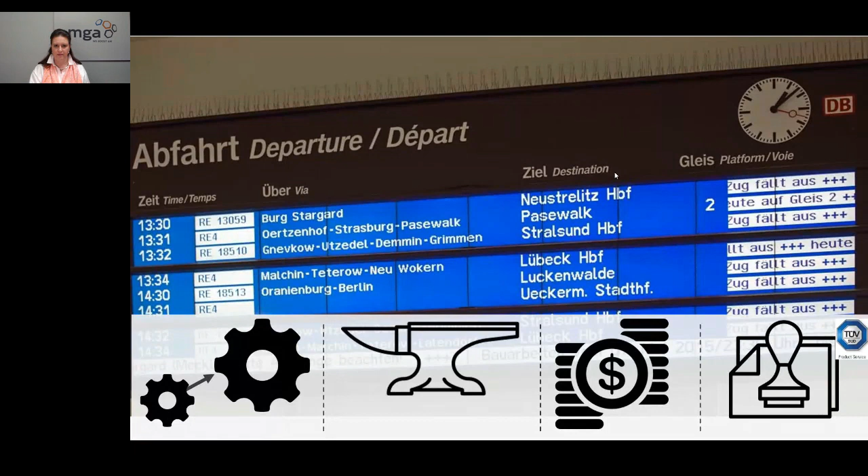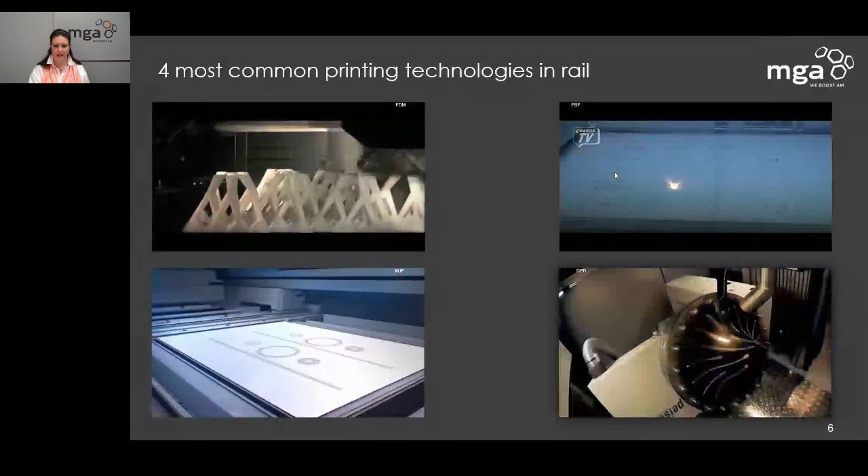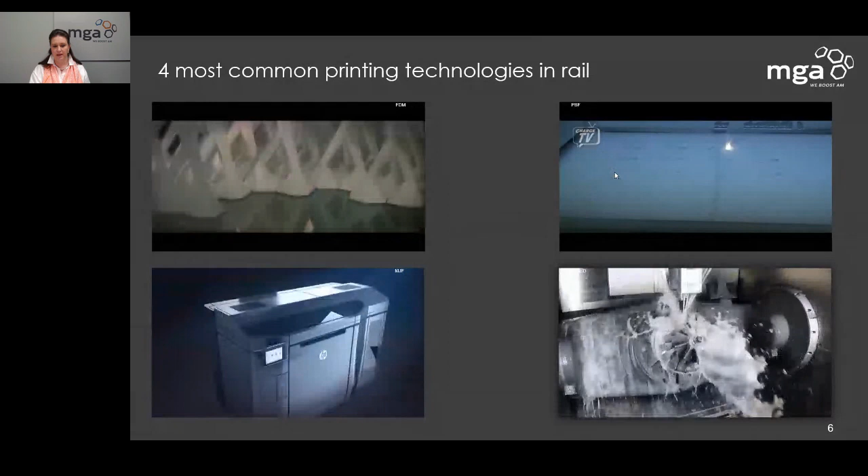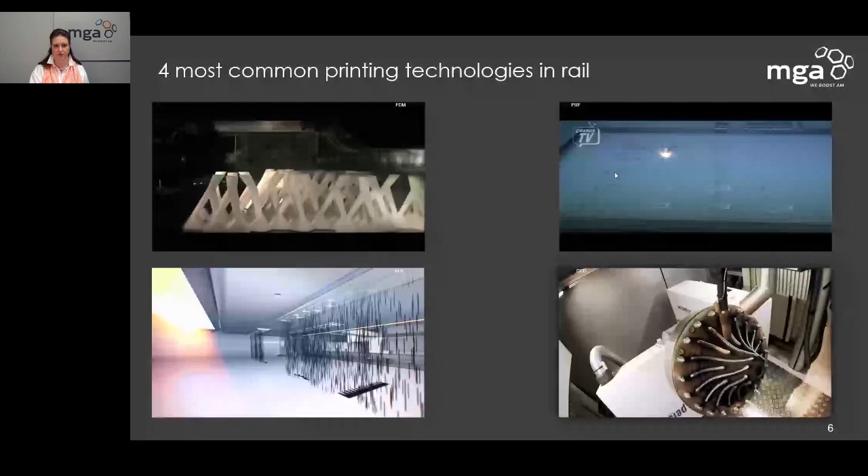So what are the main technologies we are using in the railway sector? A lot of FDM. This is due to the fact that our high levels of quality and flame retardancy are just and only covered by FDM materials. We use powder bed fusion quite a lot, and later on I will show you some parts of what it's used for — for instance, in the polymer sector as well as in metals. We also tried out multi-jet fusion, since there we can cover a lot of different parts, and the coloring aspect is very interesting too. And we need big metal parts, so we use wire arc additive manufacturing, which you can see in the lower right.

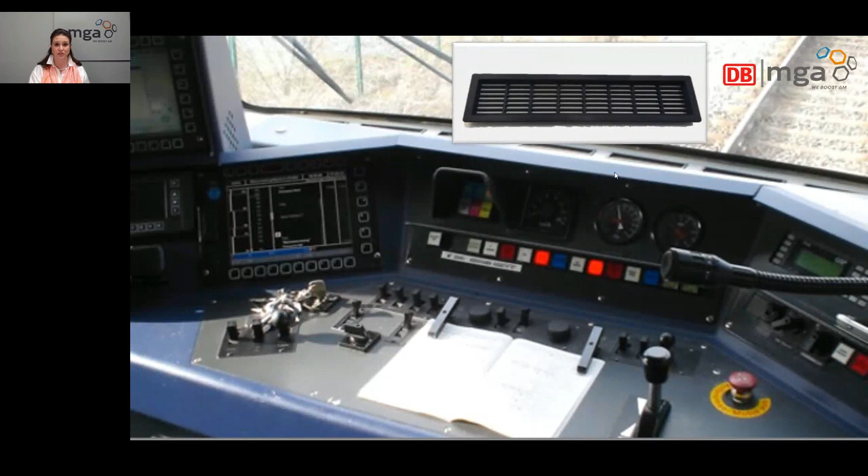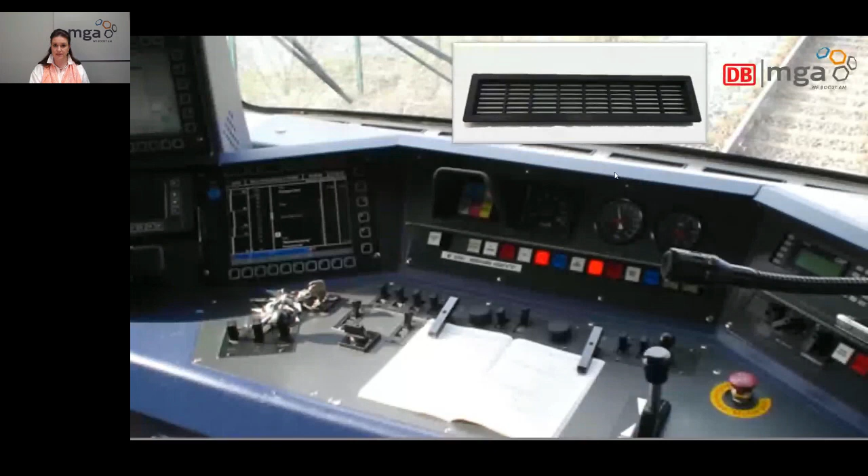So this is a typical part we've printed for the rail sector. It's also responsible for the air conditioning system. This is a driver stand you can see here, and this is a very typical part. What's really interesting is that it's quite common, like the aviation parts from Lufthansa or other flying companies, but the design is just a little bit different, and therefore we need this very high level of flame retardancy.

You might ask why it is so important, and we have a lot of materials already certified for the aviation sector. Yes, but that may not be sufficient. Because in the aviation industry, as soon as you've landed a plane, you have like 90 seconds until at the latest the plane is emptied.

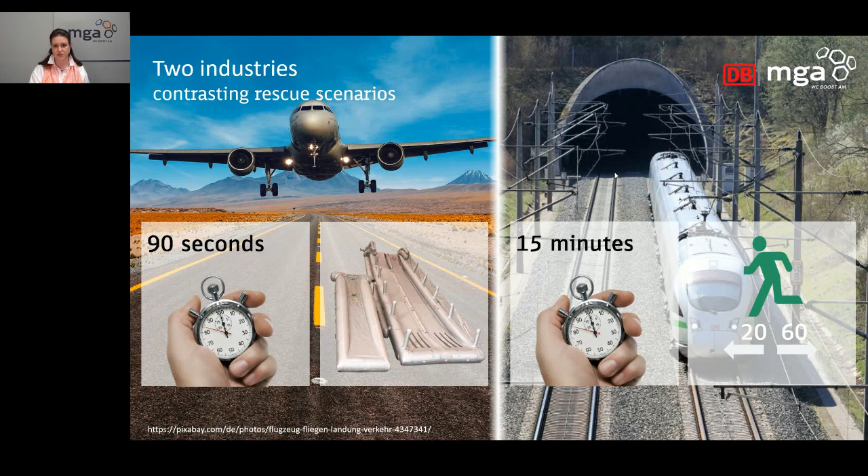In a train, you might need 12 or 15 minutes coming out of a tunnel to be able to stop anywhere and get all those people out. If you take into account toxicity concerns, and that we don't have oxygen masks in trains, you'll understand we have a different level of flame retardancy required. And that can be covered with FDM technology.

In the railway sector, we also have very interesting individualized cases. Handrail signs for blind people are a great example, because each one is unique - saying things like 'street exit XYZ.' Each sign needs its own translation into Braille. So we tried additive manufacturing of metal parts for this, and it even lowers costs by up to 50%. This is really, really interesting.

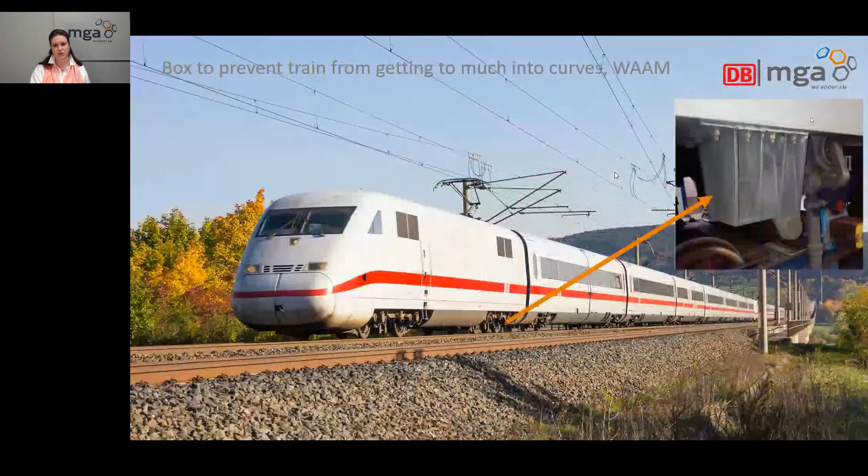As I mentioned, the railway industry needs a lot of very big parts. This is a box - a 27 kilogram heavy stainless steel box - used on high-speed trains going 350 kilometers per hour. Of course, it's a safety relevant part because it prevents the train from going too far into curves, so we need a lot of certification.

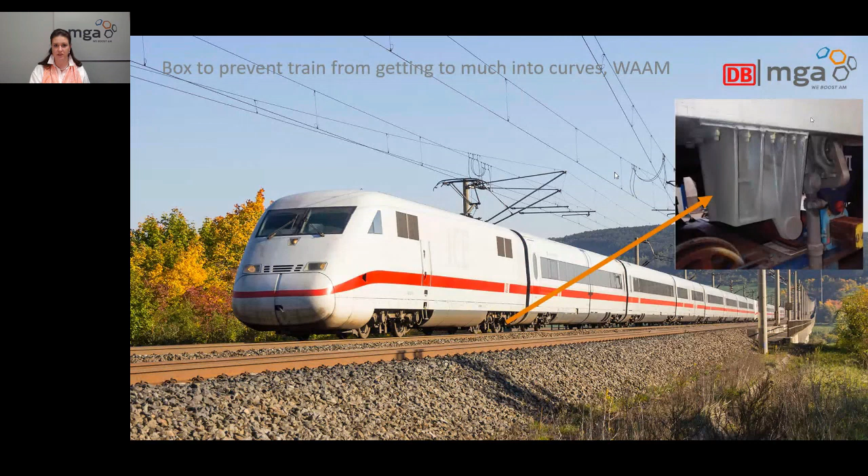If you do something like that, you really have to cover a lot of certification processes. So this is what we've done: we put it on a test stand and simulated another 30 years of operation, though we only need 7 or 8. We did a lot of testing and CT analysis, and now we're absolutely sure this part is exactly as good as the former part.

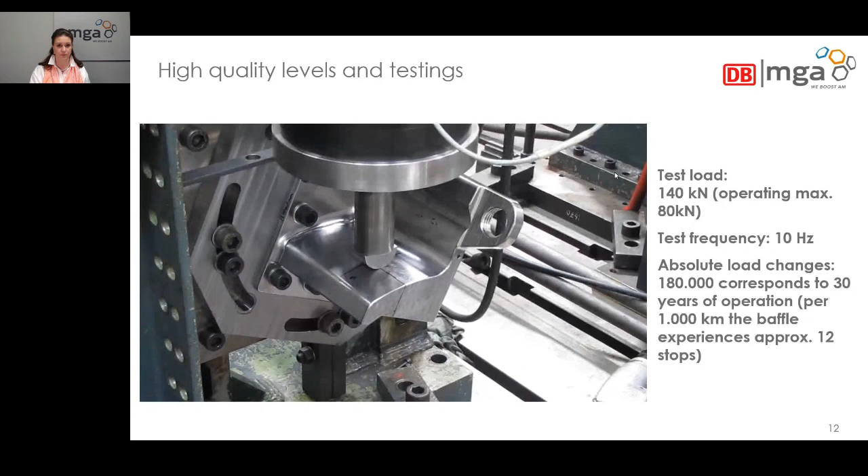As soon as we try to exchange an obsolete spare part, we have to fulfill the requirement that form, fit, and function are the same as before.

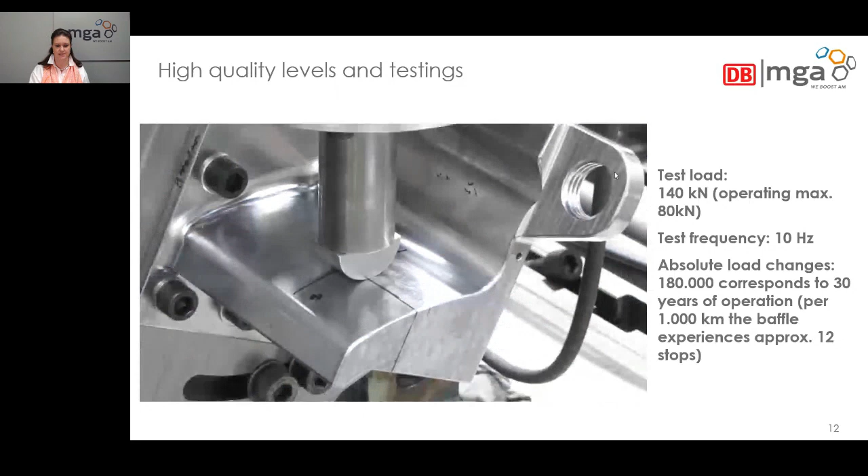If you go to the printing industry, every printing provider will tell you they can do everything, which is nonsense. So we initiated an audit in cooperation with the certification body TÜV Süd, and we asked our printing service bureaus to complete this audit before delivering parts to railway companies. This is a general audit logic that can also be used by other sectors.

Something that came up the year before, in 2021, is the tooling aspect. Usually in other sectors you'll find it the other way around - they pick the low-hanging fruits with tooling first, and do spare parts afterward. We did it the other way around, but now we've also started doing tooling.

What you can see are little fixtures and templates used to fix little stickers, like here on the headrests of seats. Before, they always had to measure how to place that little sticker, and now they just have an easily printed aid to do this quickly and easily.

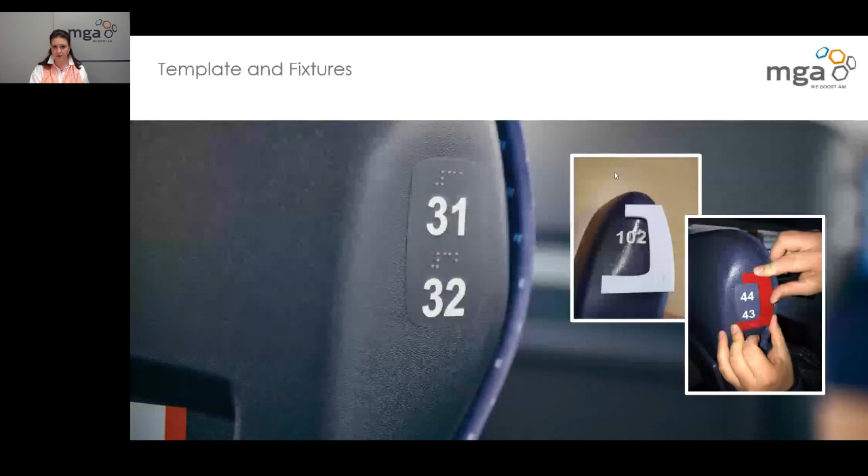Fast, lean management are also big issues in the rail industry. This is how we support lean projects in the rail industry, by printing little fixtures for shadow boards.

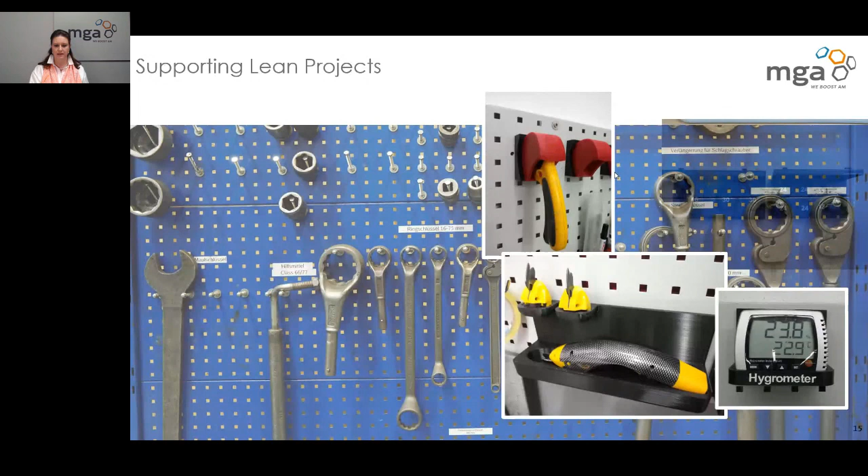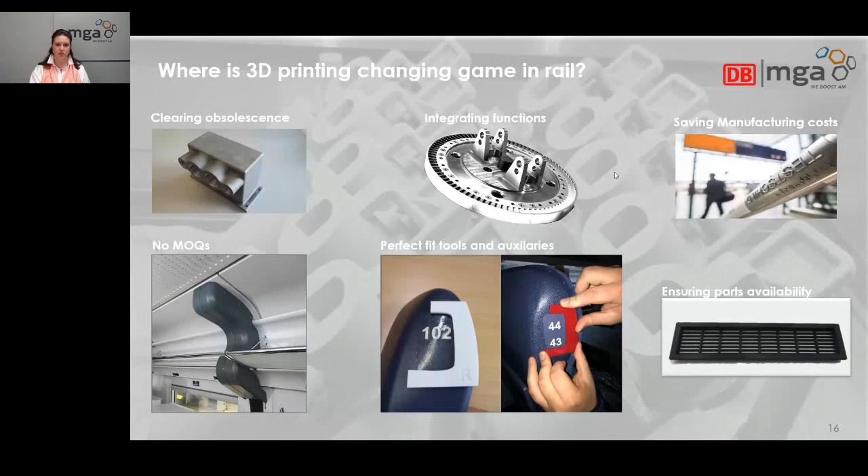If you ask what we use additive manufacturing for in general in the railway industry: for us, it's a great solution to get our hands on printed parts we couldn't get on the market anymore, clearing obsolescence. We've also integrated functions to make maintenance easier, and picked some very interesting economic cases. There are no minimum order quantities, and in the railway sector we're often talking about just 1 to 50, or 1 to 500 parts needed, so additive manufacturing makes sense. We print a lot of tools in our premises and maintenance workshops, ensuring part availability.

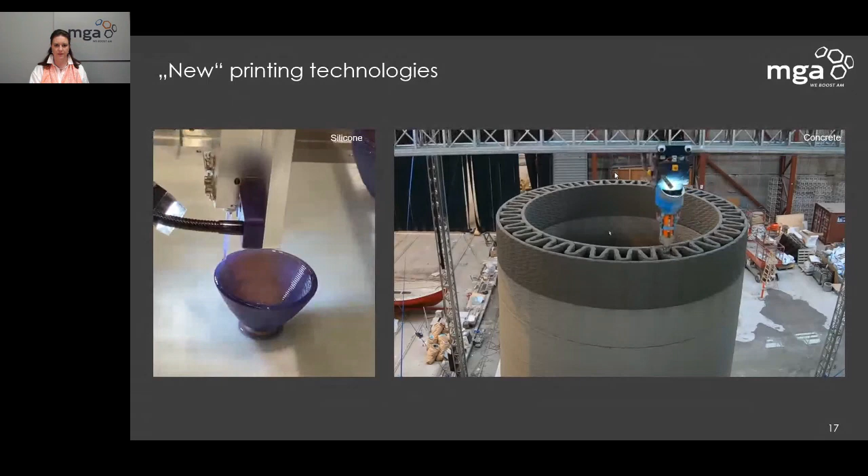So what are the latest trends in rail? What we're needing is an equivalent for rubber parts, so we figured out that silicone printing would be very attractive to us - this is a technology we're just about to test. Another thing is printing of concrete. If you dive a bit deeper into concrete printing, you'll find it's at the point where spare parts printing was approximately 5 years ago. So they have a bit of a way to go, but it's already very interesting.

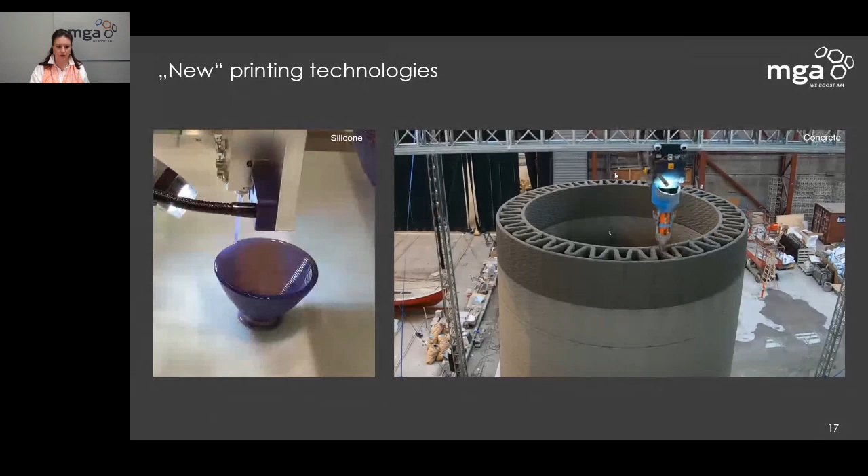What kind of rubber parts am I talking about? I'm talking about seals, bellows for dust covers, bumpers, and some elastic holders. So there's a huge variety. And they all have in common that after 6 years, whether you use them or they're still in your warehouse, you have to throw them away, because our regulations say you're not allowed to bring them into the trains anymore. This is why it really makes sense to print those parts in small numbers on demand.

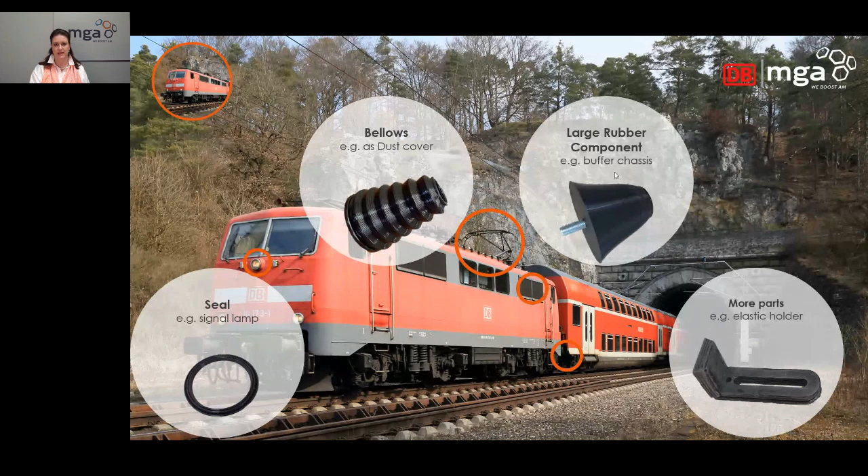With that, we can save millions of euros. In the meantime, at Deutsche Bahn, the German railway company, which is a huge corporate with more than 300,000 employees, we started in 2015 with the first printed parts, which was a coat hanger. Then, one year later, we founded Mobility Goes Additive. The idea was to exchange with other companies about printable parts and their experiences with certain materials, and to enhance the number of printable parts.

In 2018, we printed our first huge metal parts. And then we established what we call an employee competition to get our hands on the great ideas of our employees. Our next big aim, and this is really a huge task, is to be capable of printing 10% of our parts on stock.

To give you an idea, just in the rolling stock segment, and we also have a lot of infrastructure too, we have parts worth 600 million euros on stock every year. As soon as we can exchange that against printed parts on demand by maybe 10%, we have a pure cash out. This is what we're aiming for next.

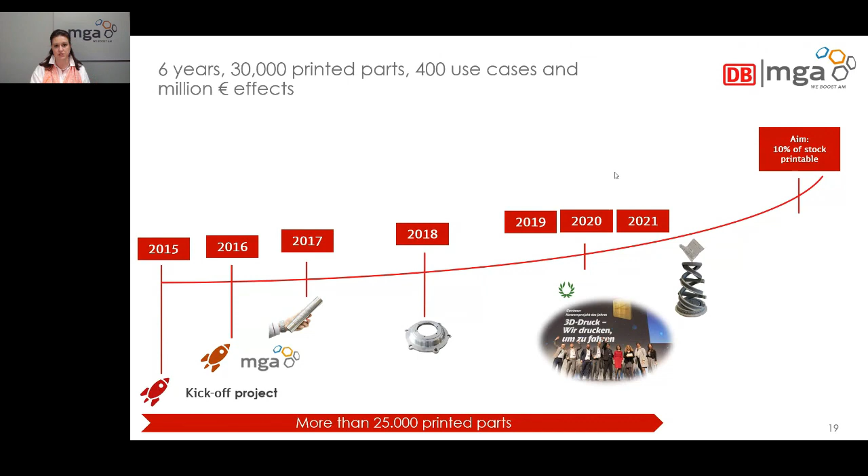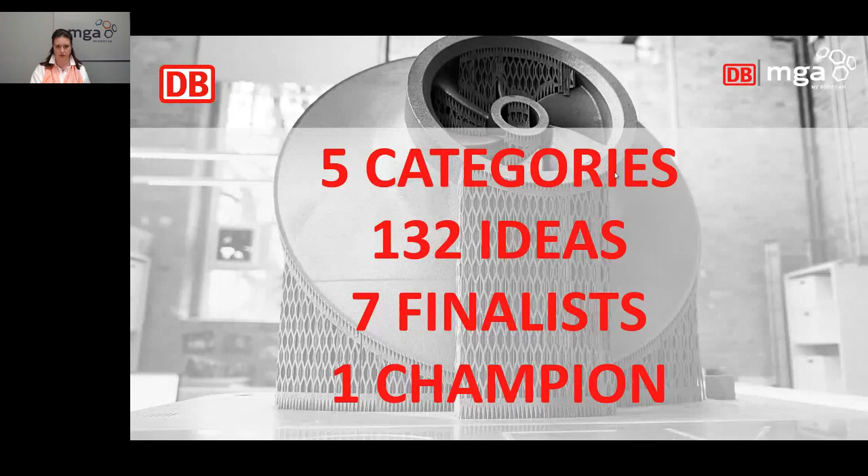In our employee competition, which addresses not only engineers but all people throughout the company, we have 5 categories. We got more than 130 ideas. We had 7 finalists and 1 champion, of course. Here you get to learn what the ideas were.

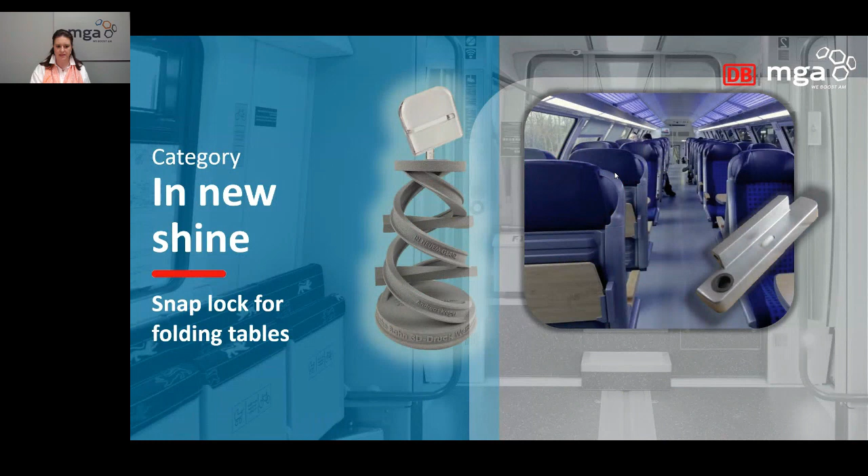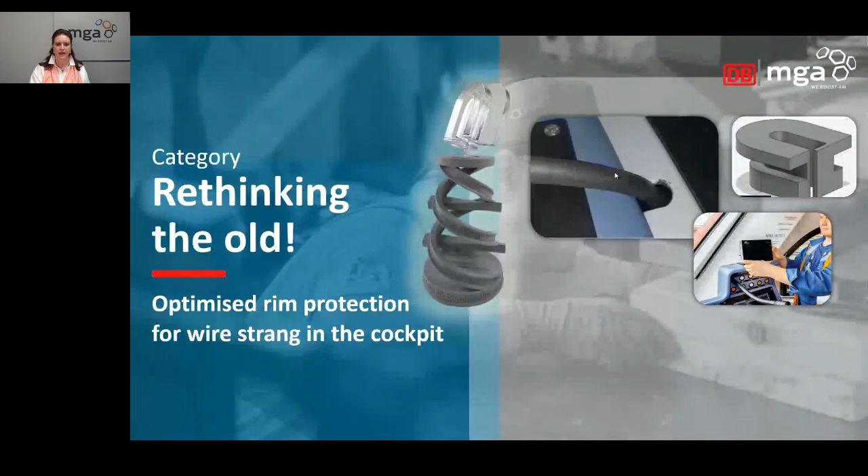So we have the category 'In New Shine', and there we had a snap lock for folding tables. We have an optimized rim protection for wire strang in the cockpit, which broke before, and with just a very little part we prevented that.

'On and Along the Track' is the next category, talking about infrastructure use cases. There we designed a simulation model for railway construction projects. Those are very, very expensive, talking about billions of euros. If you can talk about who's doing what in advance using such a printed model, then the printed model is much cheaper already than the previous model. You can save a lot of money because everyone has the same understanding due to the model.

So, of course, if you want to get your hands on the great ideas, you also need to honor your idea people. This is what we did in a huge conference. One of our board members, Sigrid Nikutta, here in the red dress, also a woman by the way, did this in a very, very nice way. Those people, maintenance workers, were really happy to be part of such a great event.

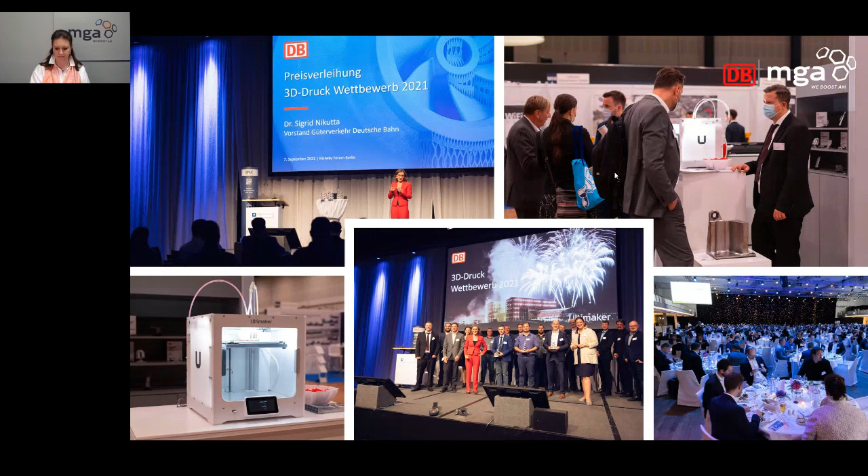We brought together all our experiences in the network, not only from the railway companies but beyond, in a book about AM change management. So if you want to introduce additive manufacturing in your company or corporate, you always have to bear in mind it's a change management project.

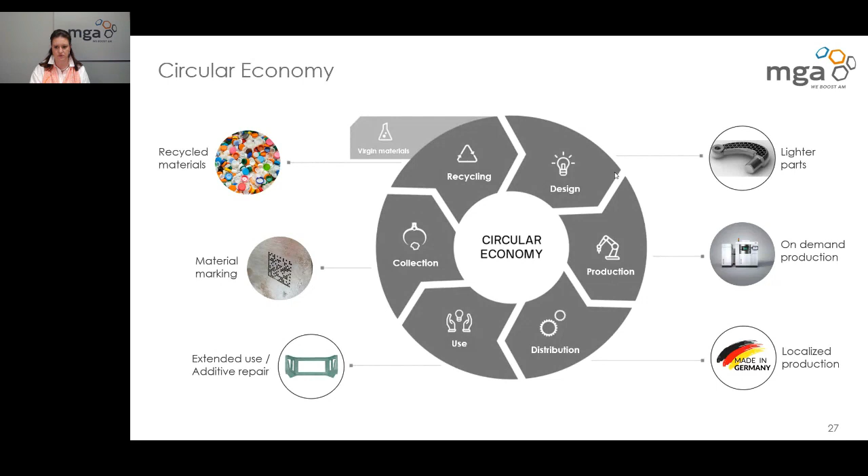What's the next big topic? Sustainability. For the sustainability aspect, we have to talk about circular economy. There we already have a lot of very interesting answers from the 3D printing industry. Some I've mentioned before, and now we've done a calculation for a metal spare part.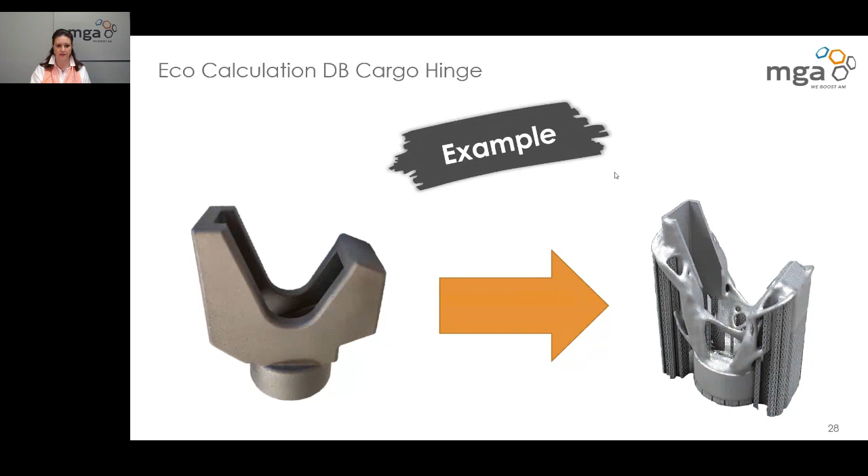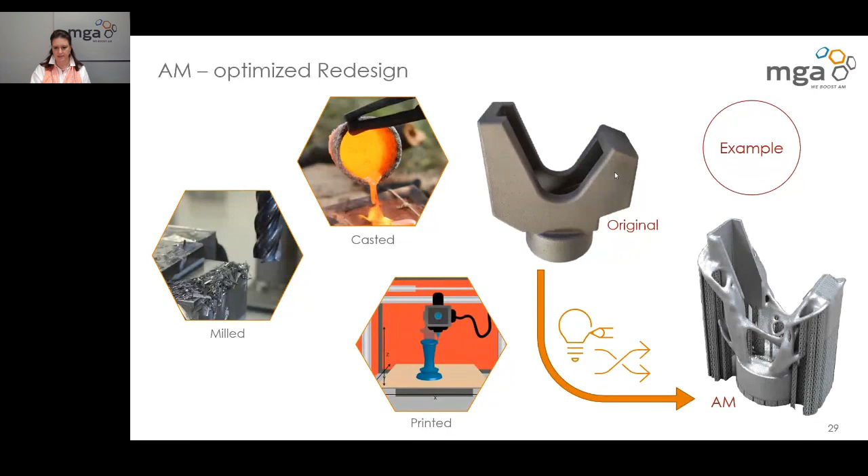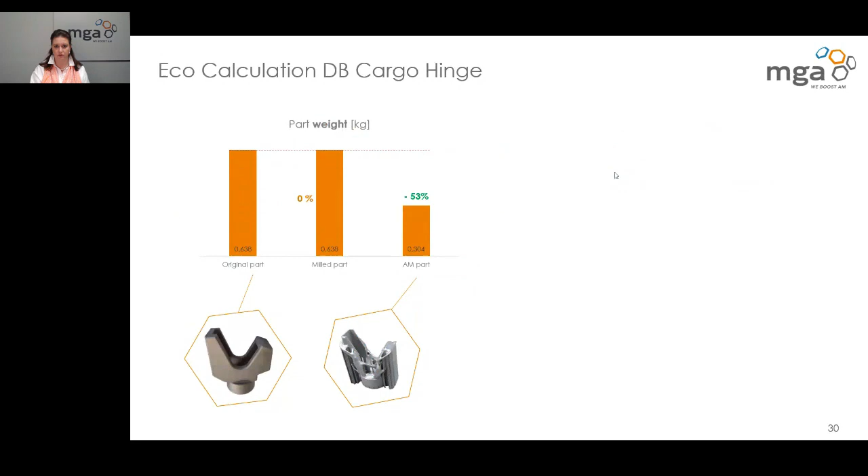In this case, it's a cargo hinge, about that big. There we analyzed: first we optimized the design, then we printed it, and compared it to the casted, milled, and of course the printed version. So from the original to the AM specially designed part, we've done a lot of analysis. The good news is you save a lot of weight, which isn't crucial in rail, but you also save a lot of material, which is much more interesting.

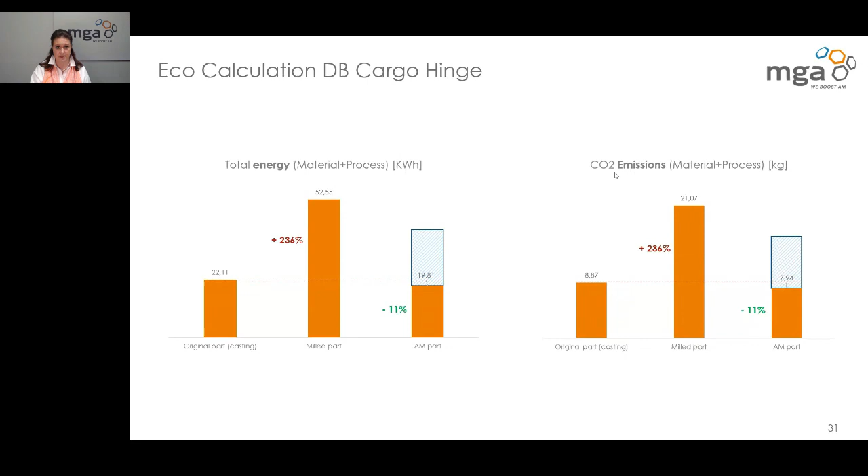And of course, you save a lot of energy, especially compared to the milled part, and therefore also concerning the CO2 emissions. So for the first time we have real numbers comparing different production technologies, and now we know that additive manufacturing is the sustainable technology to choose.

This is one of the working groups in our network. We have a lot more in the mobility and also medical sector. If you're interested, don't hesitate to contact me.

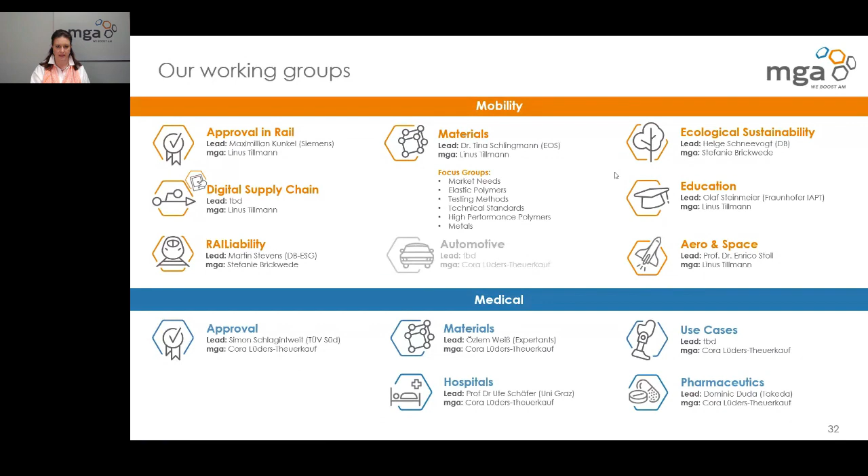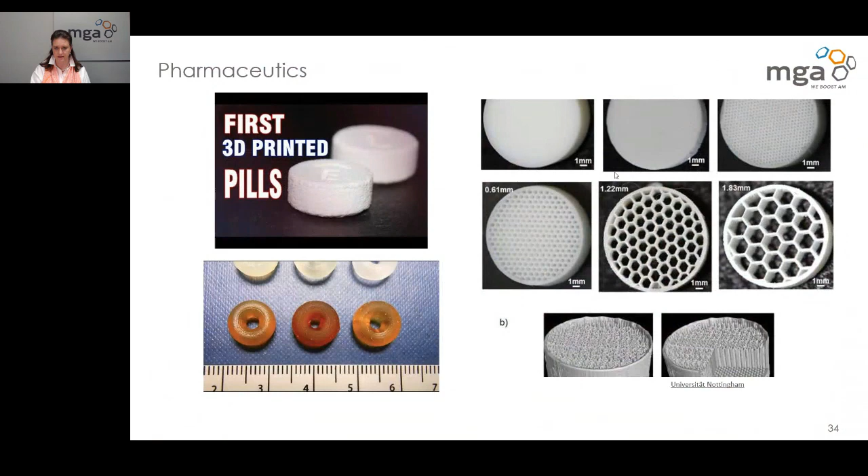3D printing already does a lot of good in medical as well as in the pharmaceutical sector, where you will in the future find a lot of printed pills.

In the network, we founded with 9 founding members. We have a lot of users, printing service bureaus, institutes and universities, machine producers,

consultancies, software companies, as well as material providers, with 140 members in total. If you want to take a look at our website, WeBoost.am, you will find many more very inspiring use cases and materials and what they are suitable for.

So this will be like a 3D printing wiki in the future. And if you're interested to bring in your cases, please contact us.

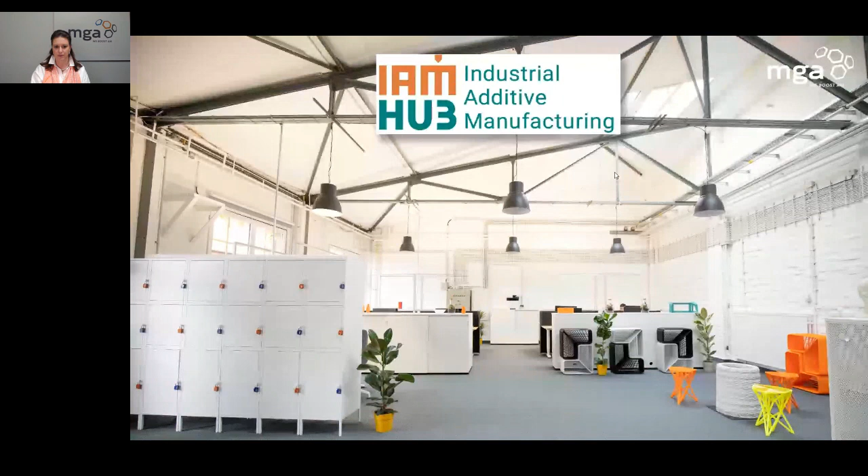Germany is a very interesting market for additive manufacturing. If you're looking for a place to be, to meet, for a co-working space in the special additive manufacturing setting, I would like to invite you to our industrial additive manufacturing hub located in Berlin, very close to the center.

Since we're now in a Women in 3D Printing event, and I'm really happy that this great organizing team set this huge conference up, we are doing something similar, a bit smaller, called Women in AM. It's also a conference, now being held for the 5th time this year, where just women enter the stage and talk about great use cases and use the pauses to get into networking.

If you're coming from the sector which is interested in aero and space, I would like to invite you also to one of our next meetings.